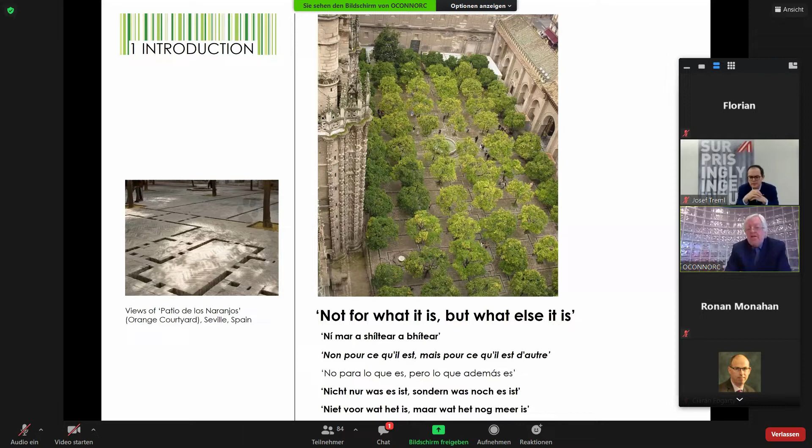So I always say about the green issues, it's not for what it is, but what else it is. I always think of that in Sevilla, where beside the cathedral, which was the old mosque, the drainage system for the town comes down and feeds the orange trees in the enclosed cloister. It's the use of that water that was being used throughout the rest of the town or city to feed the orange trees, because Sevilla is too dry in the summer months for the oranges to ripen naturally. So we had 1500 years ago people who thought about that and solved it, and in the same way, we can solve things ourselves today.

So what is it? It's urgent, it's local. It also has social, economic and qualitative elements. But I believe that you have to keep it simple, but not simplistic, and there is a big difference between that. The key relationship is between us and our world, and in a way that's as cohesive and reflective as possible. So I often think of situations like, what are the threats and opportunities? Not everything that people say is green is automatically good. So you have an orthodoxy or a dialogue: do you have the doomsday versus the economic progress?

These are not opposites. Or you have what some people would call woolly jumpers and green technology, or thinking against real R&D, or eco-bling, or citation rather than synthesis, or image rather than essence, or fascination with minutiae rather than imagination. I think it's important to move past that.

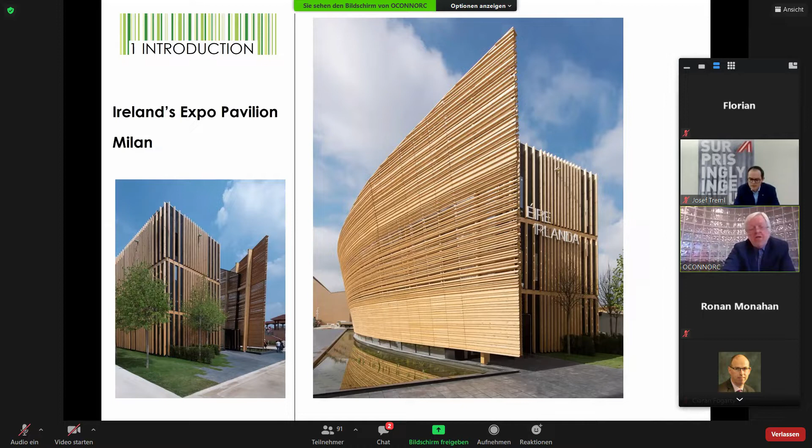You all know the principles of fairness and competition, environment, and how to reduce the impact - life cycle analysis, life cycle costing - all of those are still in development, and we need to keep that working.

We also have to meet the requirements, and we help the government in Ireland advise the Department of Environment and Housing on new forms of building regulation. We are part of a group that advises them, and SEAI Ireland would do that also. So we make those contributions, and we're now working towards near zero - we've been doing it for the last 2 years, and since last year, all buildings in Ireland have to be done to near zero.

And then the application to construction all the way from product stage through to end stage. Some of this is in early stage of development, but we are making good progress. Within the year, we would be producing a document called Green Public Procurement for Construction in association between the OPW and the RIAI. And then the whole aspect of procurement is a big issue, and EU procedures sometimes aren't the easiest things to manage.

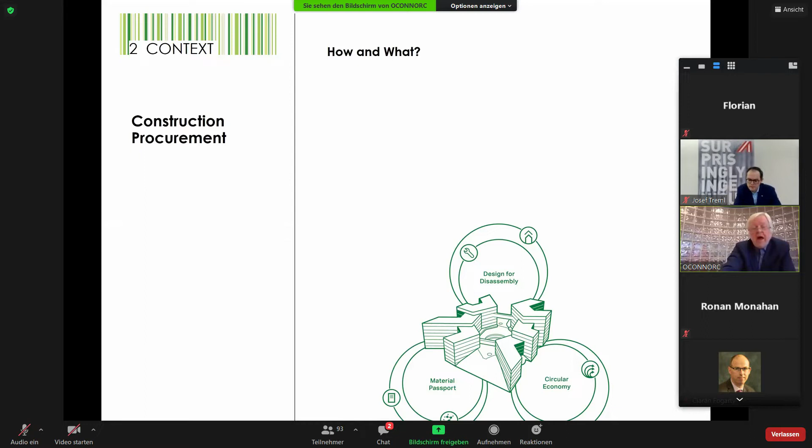And how do you manage that aspect from design through aspects of the circular economy to material passports and all of those elements that are needed. And the procurement is how and what are we. And the life cycle assessment of that and the cumulative environmental impact of all the materials. So we ask for the certificate of embodied carbon for every material that we use.

And then we are also always looking for innovation as well, and elements dealing with departments like the forestry people and others. We're involved in developing elements of that as well. And those impacts, a lot of people would be familiar with that, the materials, the transport, the maintenance, and some of that still has to have more scientific work done to it, but it is making improvement all the time.

And in that diagram on the right-hand side, all the different components that go in and how you evaluate that. And we're looking and developing that as part of our documentation. And then the stage guidance, our stage guidance that will be coming out with the new publication, will move all the way from site selection to end of life and potential end use, and the steps in between.

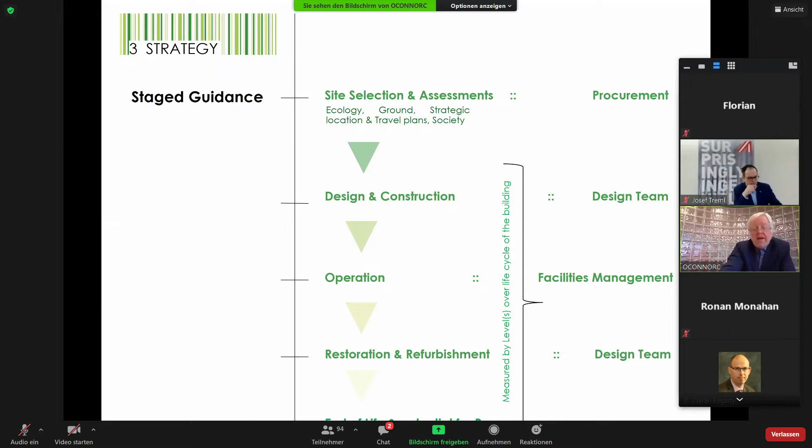So design, facility management, and then reuse. So core and comprehensive elements, the aspect of what's minimum to do and what would be better to do as comprehensive. And we still have lots to overcome in Ireland on that, with regard that if something is seen to be positive and extra, we should be able to support that.

But financially, our own Department of Finance needs a bit of persuasion on that matter, as probably most departments of finance do. We're lucky in the OPW that we're part of the Ministry of Finance, so we do have a reasonable voice there to make our voices heard.

And under our new development plan for 2018 to 2027, that's now under review, and a new enlarged plan will be developed in June of this year. Our office have been given charge of certain elements of that.

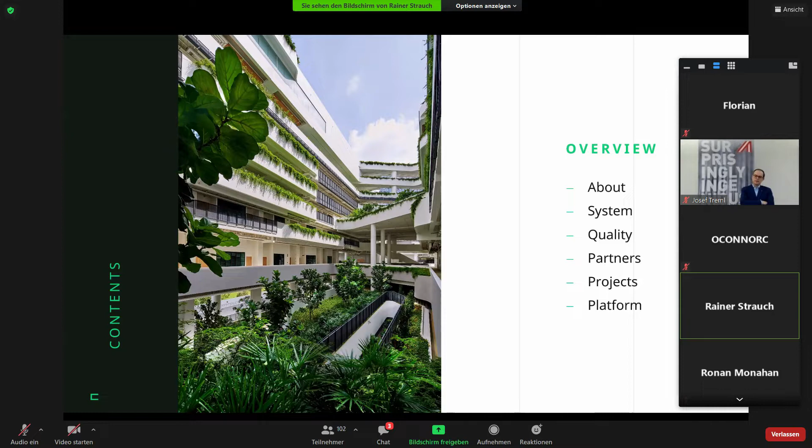And finally, the most exciting thing, I guess, is the projects we have already done, so to give you a bit of an insight into the great things that have already happened. And if time allows, I would also mention the platform in the end that we are working on right now and what this is about.

It's a timber-based prefabricated hybrid building. It's double the height than it was allowed for at the time of the erection, so we really stretch the boundaries and go beyond what is common sense in the current state. I will get back to that project briefly later.

So here's what we rely on and what we came up with first. We thought, how can we bring timber into large volume and tall buildings? So we thought about a construction system, a structural system, and a shell, an envelope of a building that can be prefabricated to the most extent, and that can be very quickly erected on site. First of all, we started with the grid lines. We knew that we need to achieve a high level of repetitiveness, so that we can also come to good economics.

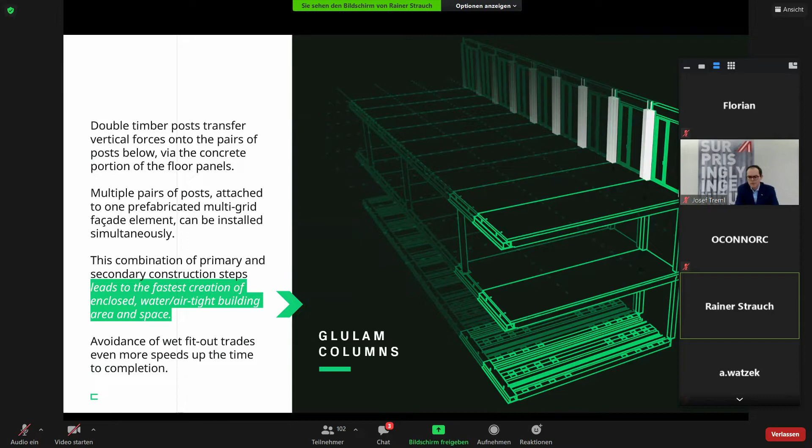If you do something in serial production, you're much better off economically. So then we rely on standard glulam columns. This glue laminated timber is a standard product that exists for almost 200 years now. It's like engineered wood, as we call it, that has very good properties for construction. Those columns come together with the exterior walls, which are non-load bearing, and they are assembled together with the columns.

Then we have introduced some interior grid extension lines. Those are pretty much girders that allow us to have wider spans, to cover greater areas, to extend the building footprint. And finally, the most important thing are the timber concrete hybrid panels. This is a mix of timber beams like glulam beams and the concrete portion that we also use for heating and cooling, so we combine the structure and also the building services in this panel.

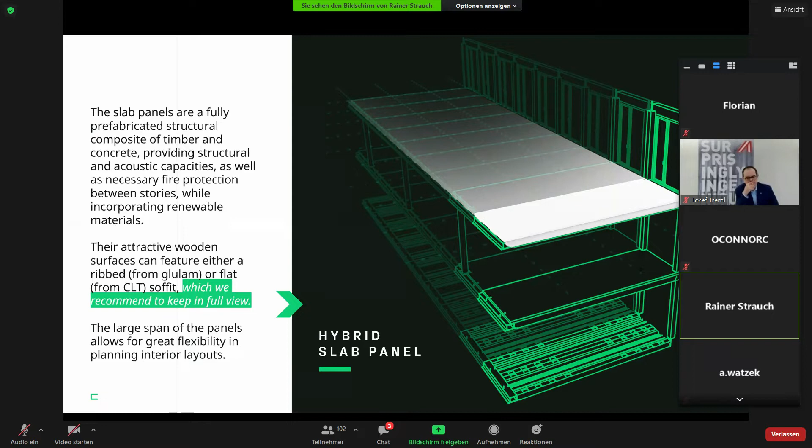When we talk about a system, we of course do not only mean the structural system and the shell, but basically the entire building. Because what we learned is if you only focus on the material and replace wood or replace concrete or steel by wood, you will never meet the economic needs of the client. So what we learned is that we need to look at the entire building from a holistic point of view to make ends meet in financial terms. We also optimize the process of construction.

What you see here is pretty much the conventional process where everything goes linear. You have a lot of feedback loops, you lose a lot of information, you consume people, resources, time and money. We think that needs to be done in a different way, where everything gets integrated right in the beginning in this CREE sense of doing things.

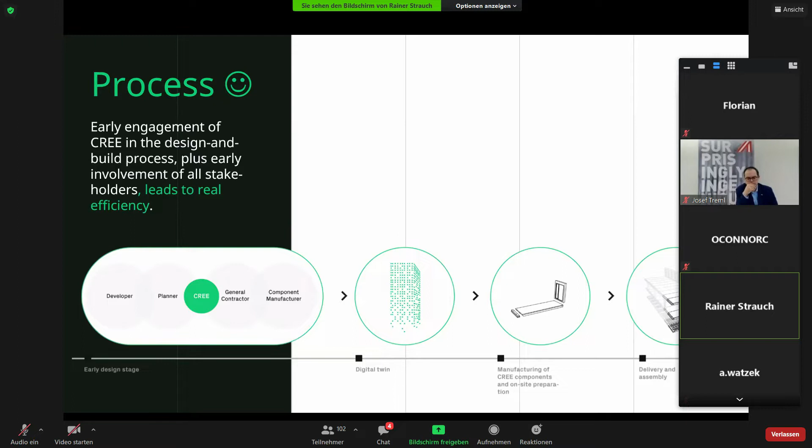The building is pretty much already there in the beginning as a digital twin. You put it to manufacturing and assembly, and then you have a much higher quality in a quicker period of time. So this is what is in for our licensed partners.

The construction companies benefit from the prefabricated hybrid components, from reduction of complexity, from minimized consequential costs from deficiency, because if you have a lot of well thought through details, nothing can go wrong on the construction site. Nowadays it's very important to have high safety standard and hygiene on the construction site, and if you only need a couple of workers instead of lots of people on a conventional construction site, then you have much better control.

So the superstructure allows for flexible layouts and easy occupancy customization. This is very important for developers.

The entire concept relies on local resources, and I'm not only talking about material resources, but also IP resources. That means local designers and developers develop and design the building, local manufacturers manufacture it, and local companies assemble it. We are not so much talking about construction anymore, it's more an assembly line. But all that is always being sourced locally.

Starting with the Life Cycle Tower in Austria. This building has been assembled in just 8 days - the entire building volume was put in place within 8 days. There were some auxiliary works which took a bit longer, but the main building volume was that quick. Here you see one floor that goes up in 1 day, and the interior fit out can happen right after that.

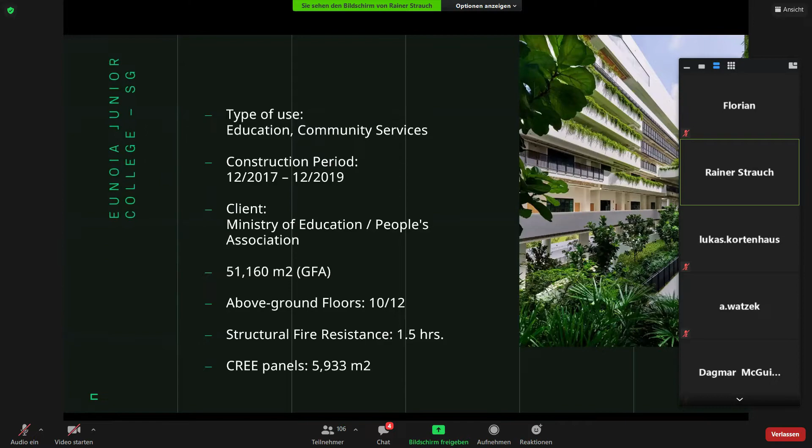That's a bit of time ago, like 8 years now. Here's a building that opened at the beginning of last year, a school in Singapore. Singapore is a concrete country, a concrete city-state.

Here you can already see some of the timber beams in the floors. It's a pretty nice environment, and the entire gray section you see on the facade has been built using the CREE system. It's 12 floors high, so we don't shy away from height limitations.

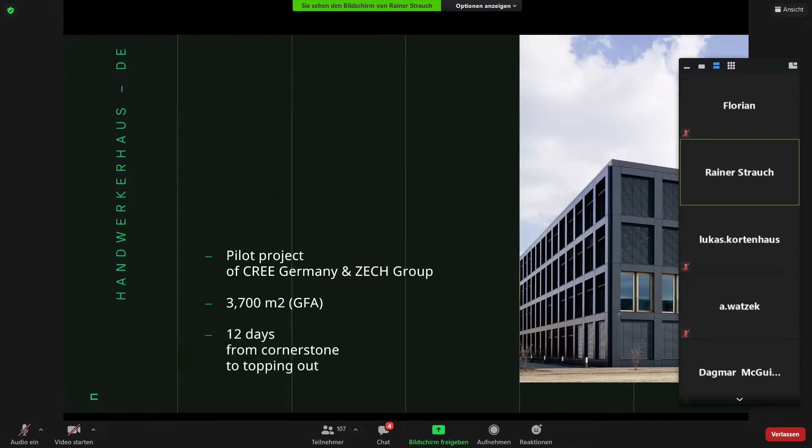This has been the first project in Germany, also opened spring last year. It's a perfectly systemized building. Construction time here was only 12 days, but for even double the size of the LCT1 that I'm sitting in. That's 3,700 square meters of gross floor area erected in just 12 working days. A bit of an insight, very nice work environment, I think.

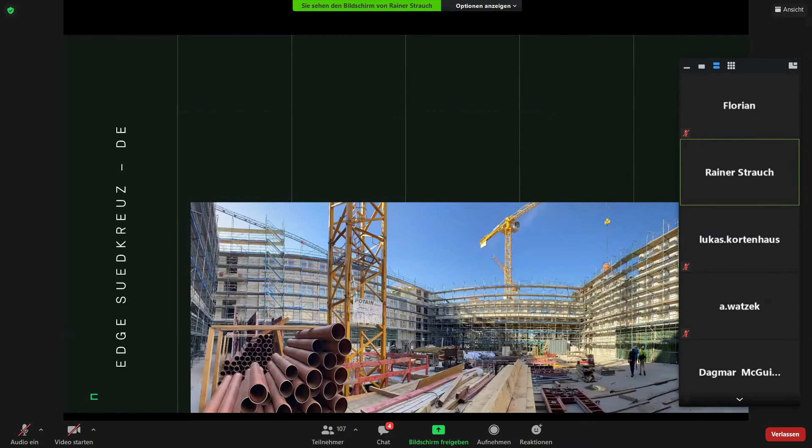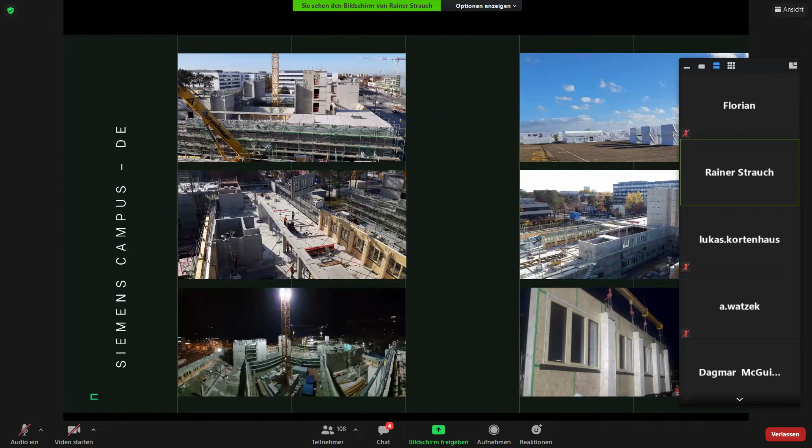In the picture on the top left, if you have a quick look, it looks like a concrete construction site, but from the interior it's almost all timber. That's the beauty, because the entire construction site is always perfectly protected from the environment, and on the inside you have perfectly clean timber for a nice indoor environment.

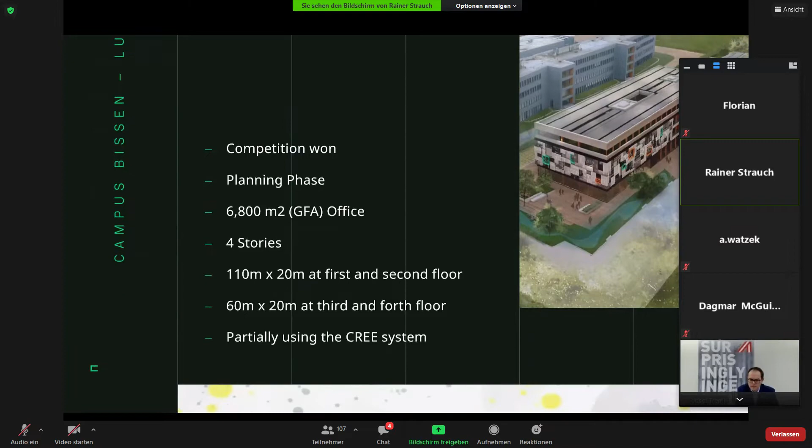Another project in Luxembourg has some beauty because it's also a very prominent building. We have won the competition there, and that shows multiple usage and also the ability to get extended over time, so you can add building parts horizontally and vertically.

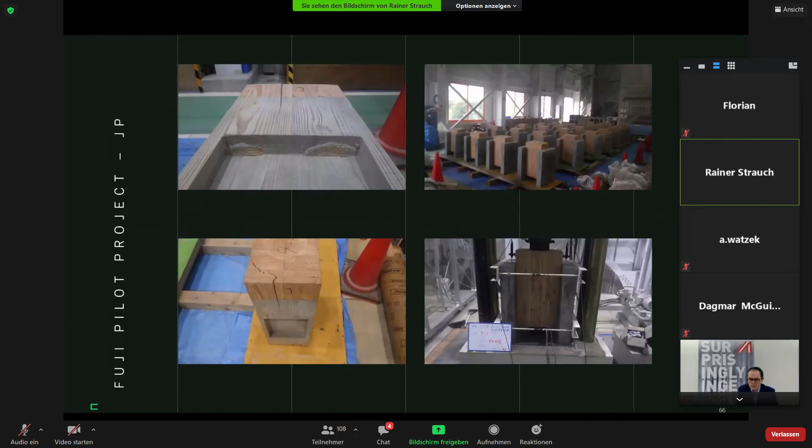I mentioned the Japanese in the beginning, so they are working on a quite small project, but they have tremendous challenges in terms of seismic and typhoon resistance. So they did a hell of a lot of testing. They Japanized the Cree system to their needs, and are going to build now this small prototype building. This is a mock-up they have already done, and it was quite amazing to see these things going up in Japan.

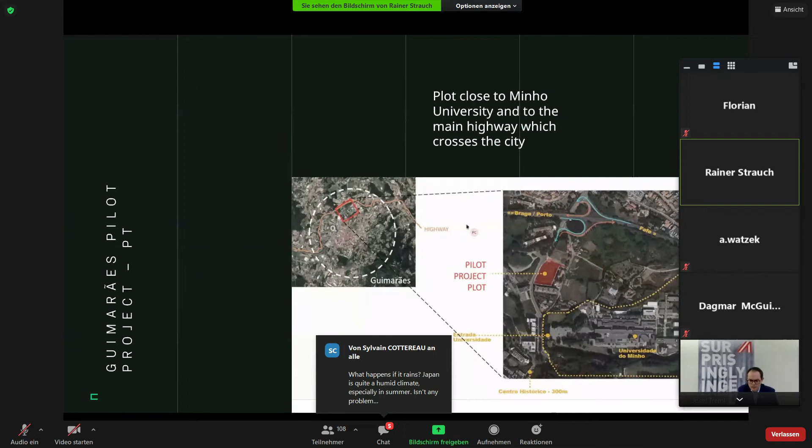Portugal has been one of our latest license partners. They are also working on a very innovative project, because here we integrate student housing and a hotel for the first time within the Cree system. It's 2 building blocks based on a concrete podium.

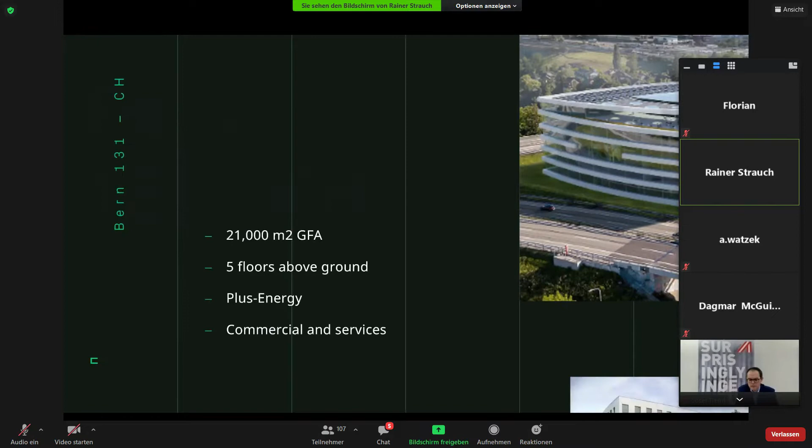I just wanted to show you this because if we always talk about rectangular buildings, you might feel a bit bored if you're an architect. But with our systemized approach, we can also tackle buildings like this, where we managed to bring a repeatable grid into the building.

So, do we have still time for the platform? I mean, I'm one minute over, maybe quickly.

What we currently develop is an online infrastructure which not only connects our license partners, but also grants access to subcontractors and suppliers and provides all the information you need. If you want to build a Cree building, you can share information, direct Q&A directly to Cree, collaborate with others, and share project status.

We have introduced a marketplace where we facilitate matchmaking between key stakeholders. We provide services for architects, and the outlook for the next level of the platform will be a multifunctional source of knowledge, of connectedness, of supply and demand. You could even run AI-based analysis over the platform.

So there's a lot of functionality coming up before the end of this year. And this helps us to enhance our global network, to make more people part of the Cree family. And that's where I like to end. Thank you for listening and watching.

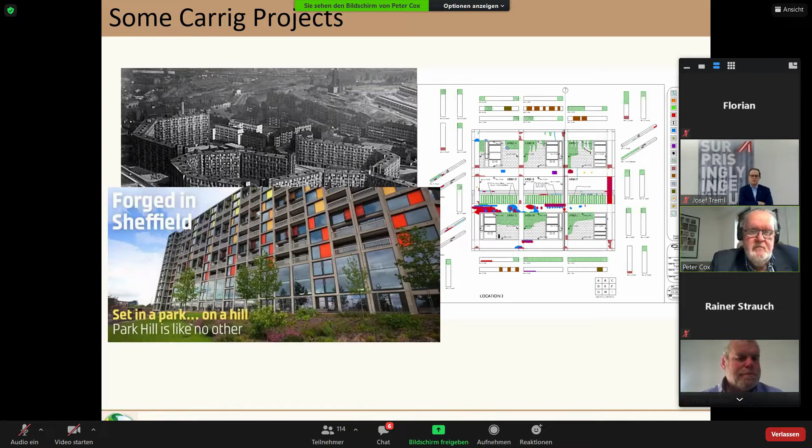And we're going to refurb and energy upgrade this building into a facility for guides and for workmen on the World Heritage Site.

We were involved in the Tate Modern, both phases. Phase 1 was restoring the 1950s building, and then a much later addition. The architect on this was actually Swiss, Herzog and de Meuron.

But one of our big collaborations is with the Fraunhofer Institute of Building Physics in Germany, which has a live laboratory in Benediktbeuern. This was a monastery built in the early 1700s. When we first went to look at it around 2011 or 12, there were about 6 monks rattling around in a building designed for 2,000 monks and 1,000 lay people.

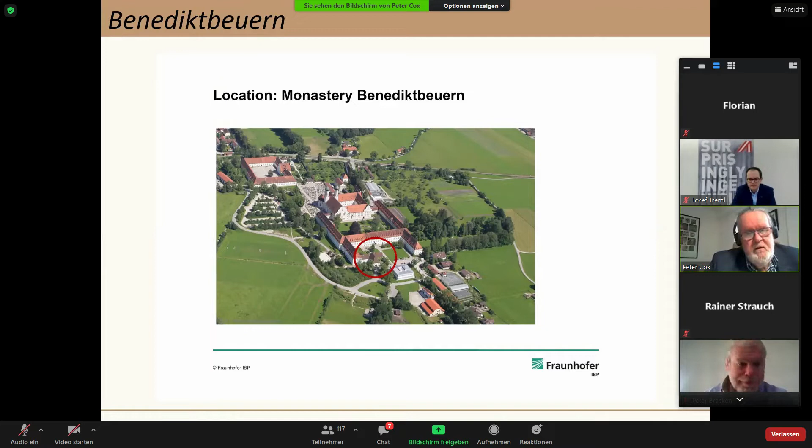So the Benedictine order gave it to the German government, and the government has been redeveloping and repurposing it over the last number of years. But they gave what was called the cooperage to the Fraunhofer.

This is a view of it in the beginning, before we did anything. It's a kind of T-shaped building, and the Fraunhofer decided they wanted to create a live laboratory here. So they looked at what they could do, and created about 12 or 15 different rooms with different systems.

We took off the external lime render that was past its sell-by date, and re-rendered it in a number of different systems. The beauty of working with someone like the Fraunhofer is they're wonderful on widgets and gadgets, and we could put every monitoring system into this building, which is phenomenal.

If you look at the restored facades: we decided that this facade we would just put back 40 mil of pure lime render as a kind of baseline. The front facade has lime with hemp added as an insulant. On this side, it has lime with cork added. And the last facade, we added aerogel with lime render, all within the zone of the original 40 mil thickness.

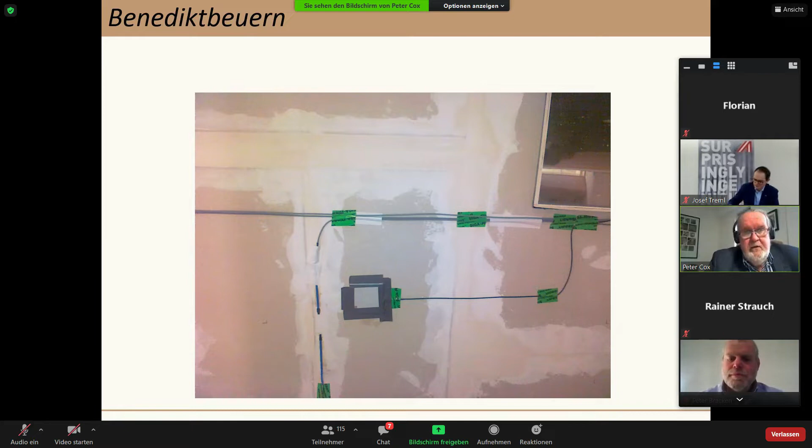On the internal side, we've again tried out different products. We've used an ordinary gypsum wall board, but we're also using Calsitherm, a lime-based internal lining. Here's some of the widgets we're using to monitor moisture movement, relative humidity, air temperature, and air quality as well, and we do this roughly every 15 minutes.

This has now been recorded over about a 3-4 year period, and the Fraunhofer are hoping to publish on this later this year.

We've also been working with about 15 major manufacturers throughout Europe to try to tweak or develop products suitable for older buildings, what we generally term breathable buildings. Because if you put a closed insulation system such as polystyrene or polyurethane, you're changing the dew point and moisture movement, which is very detrimental to the original building fabric.

We're even working with a paint manufacturer where he can add aerogel to it, so a simple painting might improve our U value calculations.

The deep energy renovation of traditional buildings was commissioned by the Irish government under SEAI, the Sustainable Energy Authority of Ireland, under their research, development and demonstration funding package.

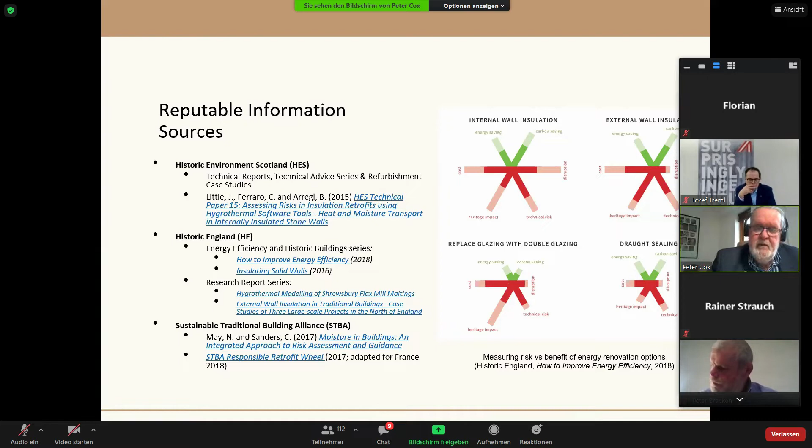What we find are the reputable information sources for this subject, which is basically energy retrofit of older buildings: Historic Scotland have done a phenomenal amount of work, and we're lucky that we also work with them on certain elements. Historic England, I've already mentioned, commission research but also produce pretty major documents which are very relevant. Then there's an organization in the UK called the Sustainable Traditional Building Alliance, and they came up with this product called the Wheel, an interactive online system where you can input information and it'll tell you what you can and can't do, or what you should and shouldn't do. It's a very good basic tool, a good one to play with.

Out of our study of the gap analysis on skills and training, one of our top recommendations was that there should be a pilot run of 10 modules of CPD lectures. We put a further proposal to SEAI and got funding assistance. We partnered again with the Heritage Council, and attendance fees were subsidized by the grant from SEAI. We ran 5 lecture days from November 1st, 2019 to 31st of January 2020. The RIAI gave CPD credit points, as did Engineers Ireland. Unfortunately the Surveyors Society of Ireland doesn't have that scheme, but it was phenomenally well received. We based it on having 100 people attend, but within a week of releasing it we had 120 applications, and by the time we had to close it we had 70 people on a wait list. So it was hugely sought after and appreciated.

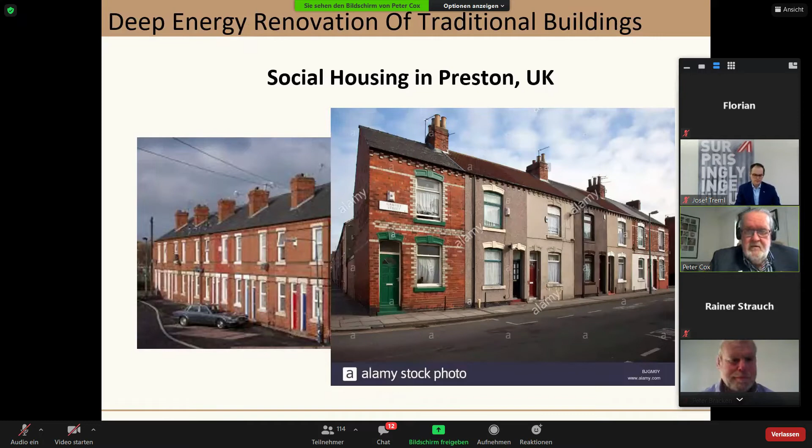So, social housing in Preston - this is one of the big mistakes that have been made, where they started putting external insulation on nice brick facades, but didn't do it well. You can see some of the changes to detail, which is what you shouldn't do with a building, changing the geometry of the building and creating major problems.

The scheme in Preston was 300 social housing units. They moved the 300 families out, spent roughly 28,000 per house upgrading it, moved the families back in, and now 4 years later they have to move them out again and spend about 150,000 per house to correct the mistakes that were made. That's not good for the industry, not good for sustainability, and there's going to be a lot of carbon dumped effectively. So we do need to be careful what we do.

The study that we did for Historic England on understanding carbon in the built environment - basically we took three case studies. Could I ask you to wrap up? Okay, I'm sorry for interrupting, but you're fine.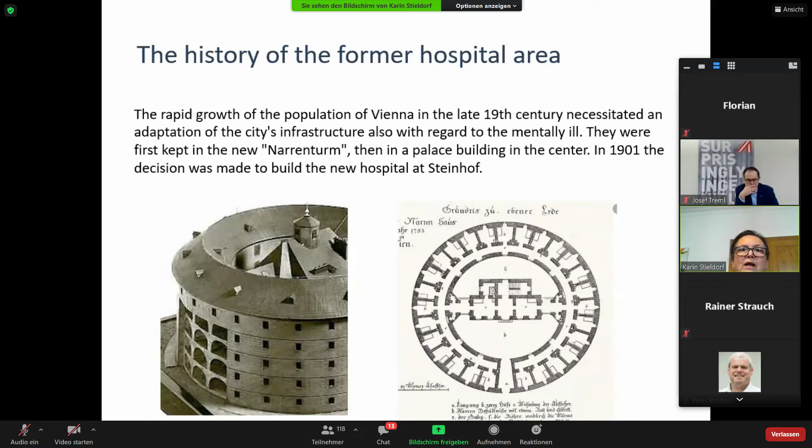They were first kept in the Narrenturm, which you can see here, and then in a palace building in the center, which soon became too small. Since expansion in a central location was not possible, the decision was made in 1901 to build a new institution at Steinhof, which was at its time the most modern campus for mentally ill in the world.

Well, now this will be changed. It's no more used as a hospital, but it will be used by the Central European University, which will move from Budapest to Vienna. And Vienna is happy to welcome the CEU.

Well, the goals of the development - I worked on the refurbishment for 1 year together with students, accompanied by a research project where we had a look at the goals. The goals were first to develop the first Energy Plus refurbishment of a large listed area.

It should be an integral design process regarding the location, which is a little bit further up from the center of Vienna, regarding further different kinds of uses. And the project task was a quite wide one in spatial organization, strategies for sustainable and energy efficient construction for historic buildings, simulations - so all these topics should be regarded within the design.

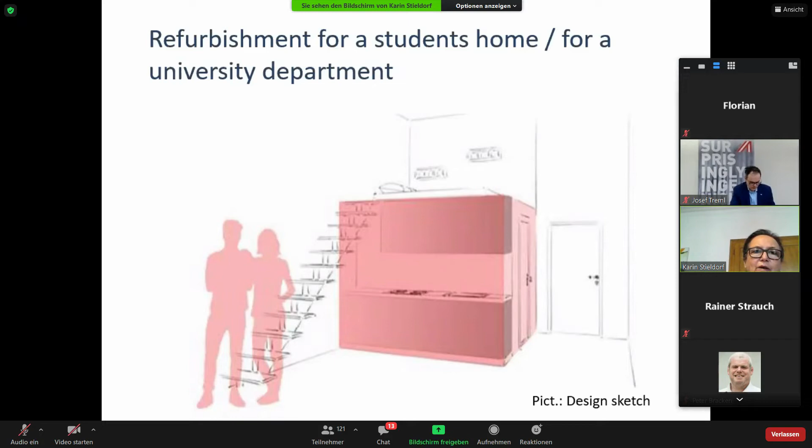Then the refurbishment of exemplary student pavilions for students' homes or for university departments, regarding the height of the rooms within the pavilions, having a look at what can remain and what should be new, and most important, also developing exemplary details for the insulation - interior insulation with calcium boards.

And of the roof with vacuum insulation, but also for the supply of the buildings. Having further a look at the exterior area, a section showing the exemplary details we worked on, and of course the area also will be supplied by photovoltaics, and this with regard to the listed area.

Some examples - this is one of the pavilions that we researched as an exemplary pavilion. There's exterior insulation on the bottom, and there could even be transparent photovoltaics in front of the facade, which could be taken away later, so it would be accepted even for a listed area.

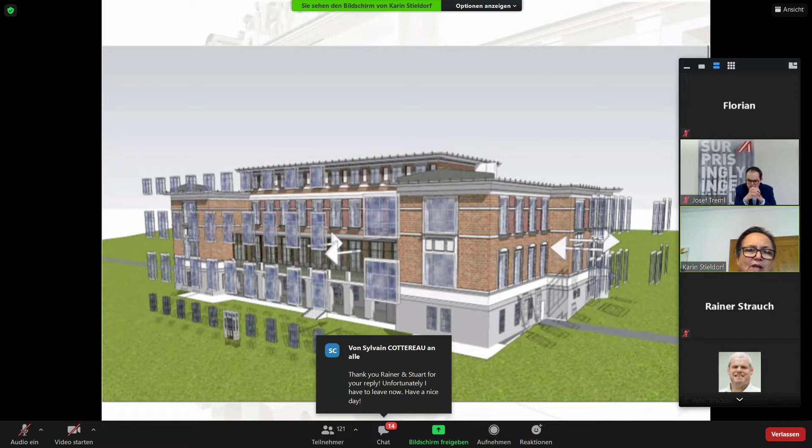Well, coming to urban residential areas, I developed a catalog of new requirements that are important for housing within the center. Some of the very important points are that gardening and food production should be included, that there should be planning guidelines for energy conscious construction, and what is quite new - a massive support primary construction and fill-ins from renewable materials.

Some examples - this was a student competition for Vorarlberg in the west of Austria, where the tradition is building with wood, integrated in the pattern of the not very dense town of Feldkirch, on the not very dense outskirts of Feldkirch.

Situated close to a kindergarten and to a home for elderly people offering assisted living, and integrating green spaces also in the interior, with a lot of light.

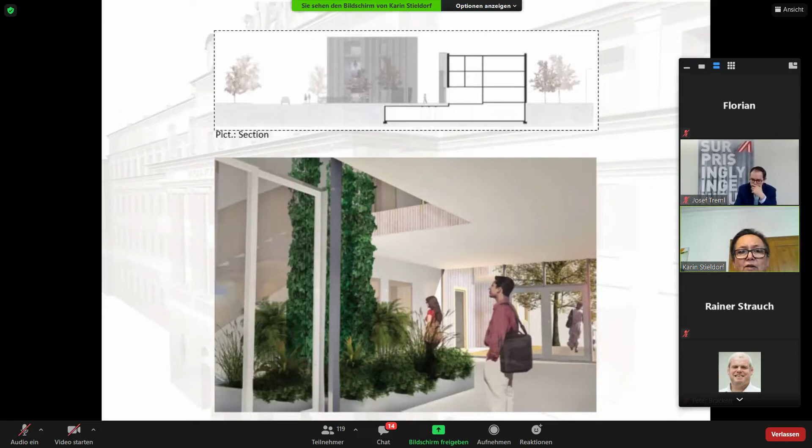A second project for migrants and students was on an empty area close to the center of Vienna. Quite frequently we still find vacancies within the structure even of the center of Vienna, and this was an example of how to activate the existing building stock, even in situations where you don't have enough sun and light. All these topics had to be explored, even regarding thermal performance, and this shows that two-story solutions can also be a good way to activate the existing building stock.

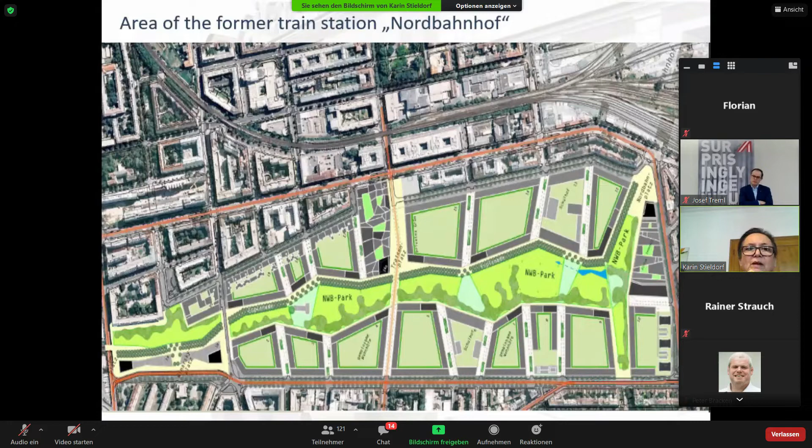This was a project for an area of an old railway station which should be activated, which is quite frequently done in Vienna at the moment, to find new uses and new structures for the old existing areas. This shows the winning project of a competition on urban development of that area, and our solution was again research-led.

It shows how to use this structure of combining massive and light elements, and even leaving some areas empty if you don't need them at the moment. This solution should also be offered to people who want to be integrated in the building process.

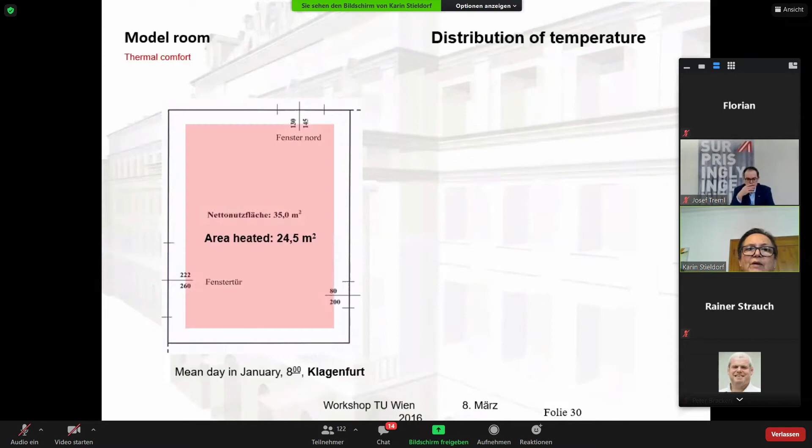One of the important options at the moment, which we also used here, is a so-called activated floor construction, where the heating is included in the massive and storing floor. This is a very good solution, because it addresses the argument to use concrete in construction, but it can still be combined with light and ecologic secondary construction.

This was the research project accompanying this work. We tried out the first elements together with students: insulated wall elements and floor elements, insulated with straw and covered with earth. Of course, other insulation materials could also be used.

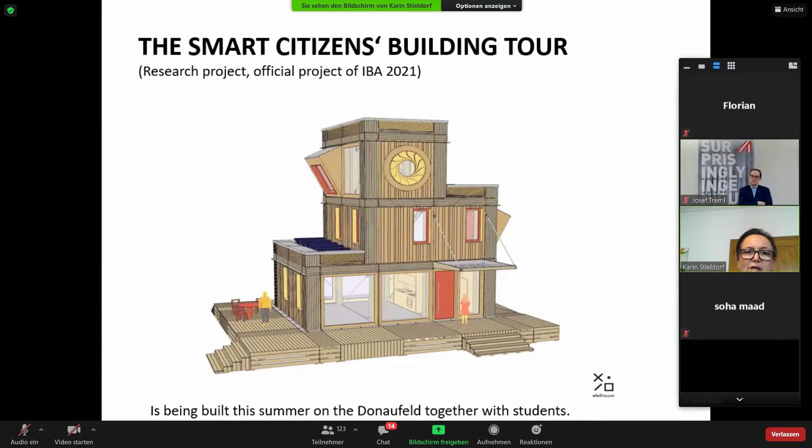The company that assisted us was Lukas Lang for that project. They built the temporary parliament, in a way that it could be assembled and disassembled and used at another place later. Here you see the elements designed and built by the students. An additional result was also a book for DIY constructions as a guideline, available for everybody. This was the production line set up at the factory of Lukas Lang.

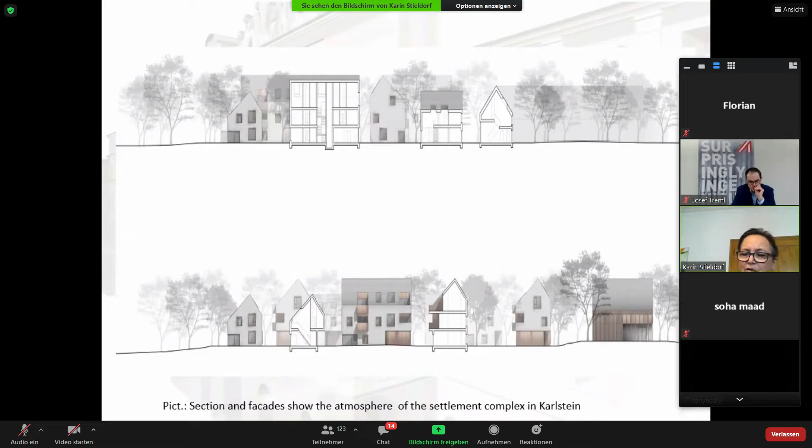We're going to rural areas, which are a little bit problematic. There we like to use the technique of the big picture to develop visions and communicate them to the people of the area. It's most important to find out the right density and how to include traditional living patterns and construction patterns. This was one project just being carried out at the moment, which shows that traditional elements have been taken up, and density also follows the traditional patterns.

Another project we were asked to deal with was the center of Kirchberg am Wechsel, a small town in the south of Vienna, formerly important for tourism but not working very well anymore. So again, using the methodology of the big picture, we developed a vision.

Our task was the recovery of the old stock, the revitalization of the town center, to define living in the town center versus space consumption in the undeveloped area around Kirchberg, and the conservation of the green spaces in the center.

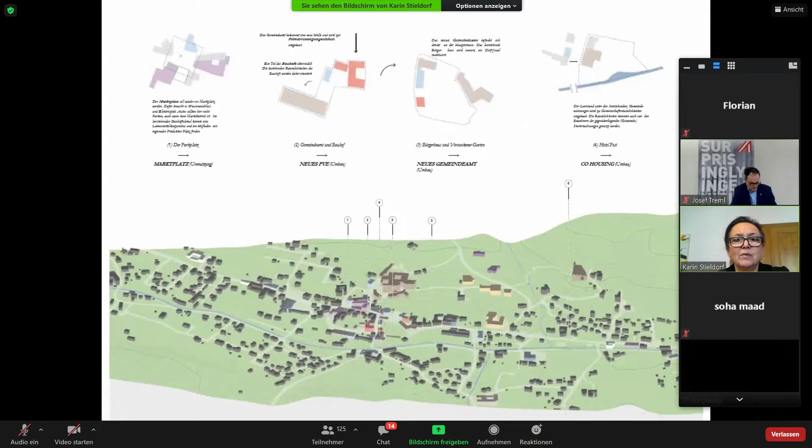The first thing to do is use the technique of walking through areas to really explore them well, and then explore in more detail the landscape, the building structure, and the traffic connections, taking a closer look at the center and how the buildings there can be restored, reused, and refurbished, concerning thermal performance, but also design, while still using the public area in the center.

Now, the last part is a series of small houses, which we made for different competitions.

This was the winning project of Gaudi, an international students competition, where the topic was to deal with ecological materials.

This house was positioned in front during the Biennale in Venice, directly at the sea. Everybody could walk through the house and have a look at how pallets can be reused and recycled, even if they're a little bit not very perfect anymore. So we could walk through and have a look.

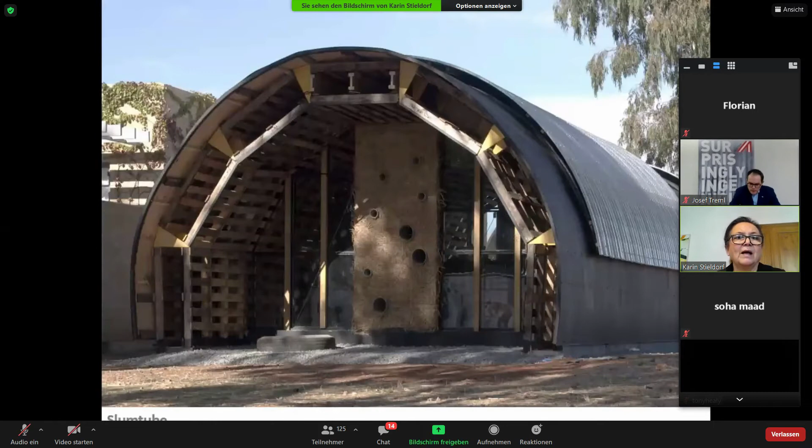This is in the meanwhile a pattern. The system was also applied for a school in Johannesburg, in the suburbs, and again pallets were used along with more recycling material. Only the sheets on top, on the roof, are new because you can't get old ones. From the statics, this was the easiest way to build without companies.

This was LISI House, which was the winner of the international competition Solar Decathlon in 2013. LISI means Living Inspired by Sustainable Innovation.

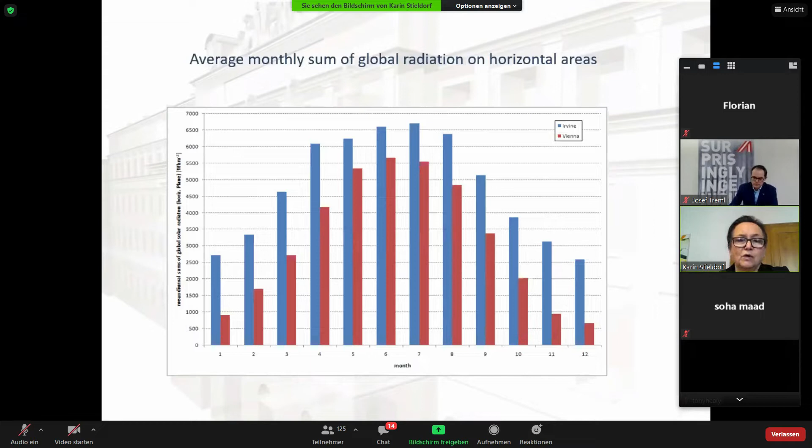The philosophy was to use wood and all parts of the tree, as Austria is a country with large areas covered with wood. The beginning was to have a close look at the climatic data, which showed that in summer it's approximately as hot, not much hotter than in Vienna, but there's a large offer of global radiation of solar energy, which can be used for the supply of the building.

So the concept refers to the Hispanic traditions of Los Angeles, and the patio in the center is a buffer which can steer the income or the use of solar energy and shading.

The construction followed modern Austrian wood construction. The building was designed in modules, which made it easier to carry it the long way from Austria to Los Angeles and back.

This is how it was mounted together with students. The interior shows how wood can be used also as a very attractive surface, showing different kinds of wood and different surfaces of wood.

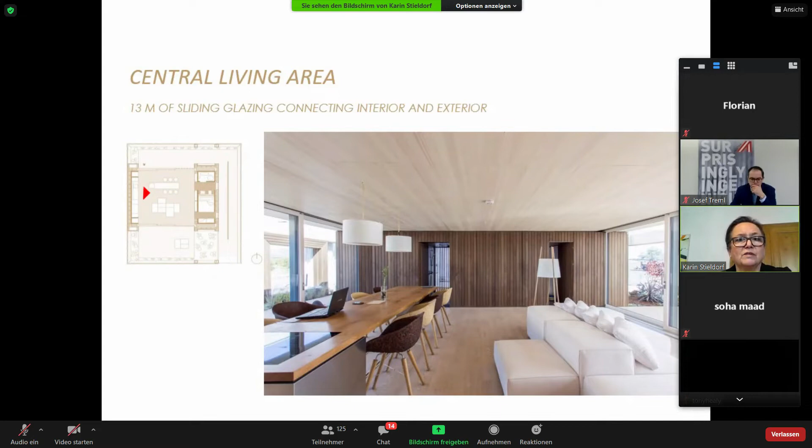Housing technology was a double flow system connected with two heat pumps, and the supply of the total area of the house in total was by photovoltaics.

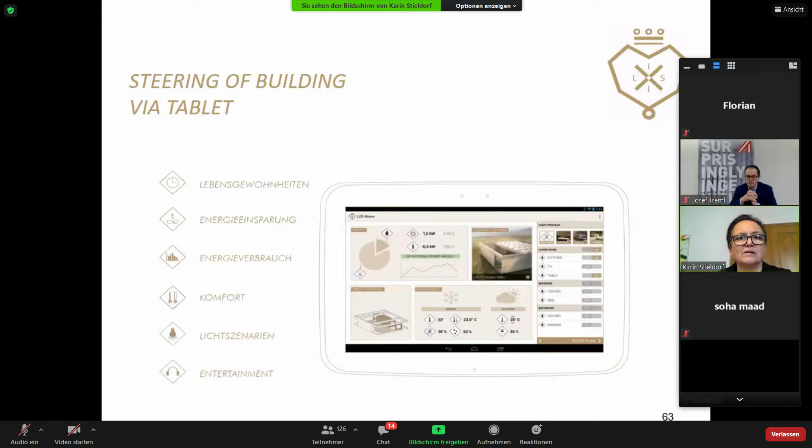And the energy balance showed how far up the plus it is - it's an energy plus building, really far above zero. The building is steered by a tablet, which was also developed for this competition, with an attractive surface that responds to the user by music.

It was published in the Architectural Digest in 2018 under the title of Building Physics, Design and the Collaborative Build.

And this is how it is set up again in Austria after having been brought back from Los Angeles, now floating on a small lake in the exhibition area, the Blue Lagoon, south of Vienna. It can also be bought there - it's shown and it's bought there. And I think many of the other producers have had a closer look at this plus energy house.

The last project I want to show you is a project.

Karin, yes? I'm sorry to interrupt you, but I think we are out of time.

Okay, it's finished, I'll just go through without detail. You can see, I think it's self-explaining - people working, a large roof, shaded areas. And this is how it works.

This is my last slide. For me, sustainable architecture matters, and it is even indispensable in the struggle for climate change and a good life on Earth in the future.

Thank you for listening, and sorry for being late.

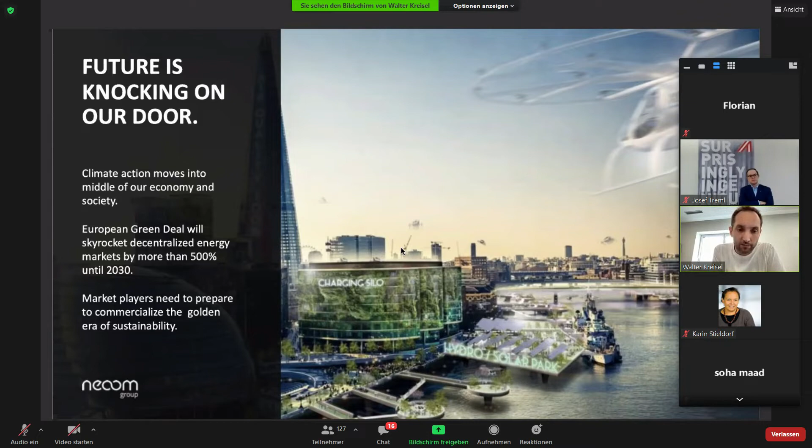So what is our business model? Our business model is holistic and integrated. We have three main departments.

One main department is the whole hardware stuff, which you will see later. It's NEOOM, and NEOOM is the coral red-driven color. On the NEOOM side, we produce products. We redesign, engineer, and certify home, commercial, residential and industrial battery storages based on lithium-ion batteries, which is a turnkey solution, fast installed, commissioned, and maintained, to keep the whole energy consumption in the life cycle process as cheap as possible. That means not only the CapEx to buy all that stuff, but also the OpEx to produce, transform and convert electricity, which is a very important case we focus on.

And surely it's driven by the big ramp-up of the electric mobility sector, because all your infrastructure has to be wired, has to produce solar on site, and you also have to charge your cars. Based on our energy management solution, we really take care that buildings can become the next power plants.

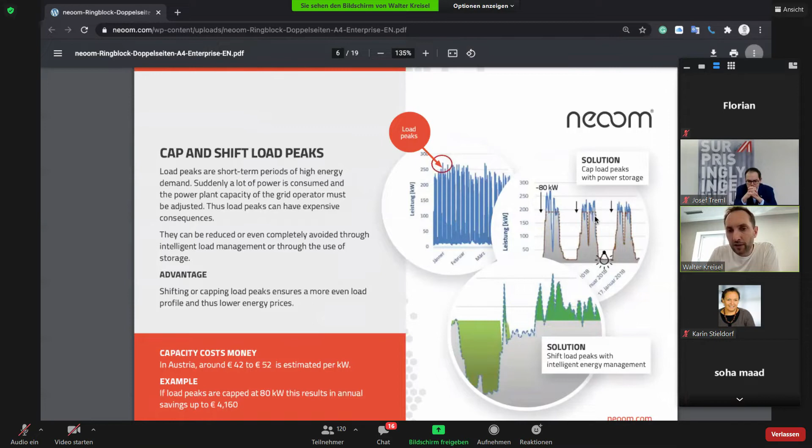Here's another calculation. If you produce 1 million kilowatt hours on your roof and have a battery, using our Austrian prices for example, it brings you 11.8% rate of return, which is really high profit after 25 years. So it's even double more than you already invested.

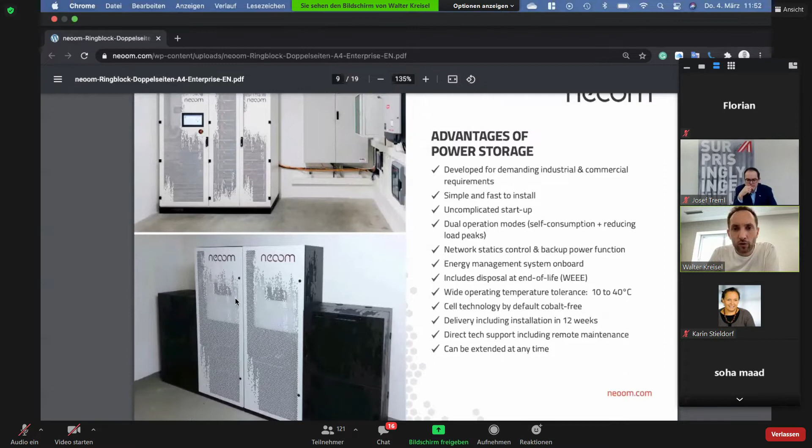From that side, this looks like a small industrial site or a private site. I will share the data — this is how our software looks like. And there is also a future-proofed business model.

Think in applications: with the software you can also count your CO2 consumption, and connect applications for buying electricity on the stock exchange or on the frequency response market. That means your income, based on your investment in the infrastructure, is really driven by high value. So that's from my side, from NEOOM, and thank you.

We are now in Zurich, Vaduz, Munich, Freistadt and Vienna. Me and my team, our management team and the board, are happy to help you also in your country, to bring down energy costs, have lower CO2 consumption, and make the energy transition possible. If there are questions, write me, or contact us anytime on our website at www.neoom.com.

Thank you very much, Walter. Very interesting insights, and thanks — I really like that you put numbers on it, because sometimes you don't get this real hardcore detail, which makes the technology even more interesting for clients, potential clients, or people who want to partner with NEOOM.

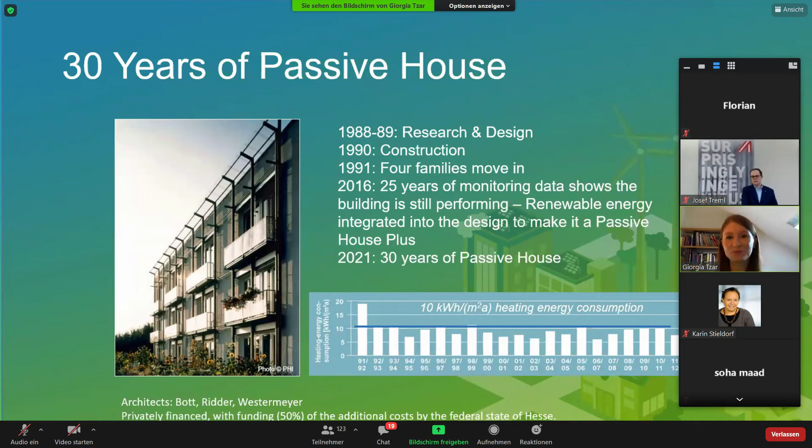The first Passivhaus then went on to inspire a global movement. We now have 2.7 million square meters of total floor area of Passivhaus buildings around the world today. And we also have an entire market for these products, so no more requirement for DIYing these—there's now a wealth of suitable components available.

But for some of you here today, you might not be so aware of what the Passivhaus standard is and what a Passivhaus building is. At the heart of it, a Passivhaus building is a highly energy efficient building. It is based on the Passivhaus standard, which is a quality assured, scientifically proven method to achieve highly energy efficient buildings across new builds and retrofits of all kinds and across all climate zones.

There are 5 principles that go into Passivhaus: climate appropriate thermal insulation, Passivhaus windows, adequate ventilation strategy, proper air tightness, and a thermal bridge reduced design, so that a Passivhaus building works much like a thermos, keeping the warm air in when you want it in the wintertime and keeping the cool air in the summertime when you don't want to be overheating.

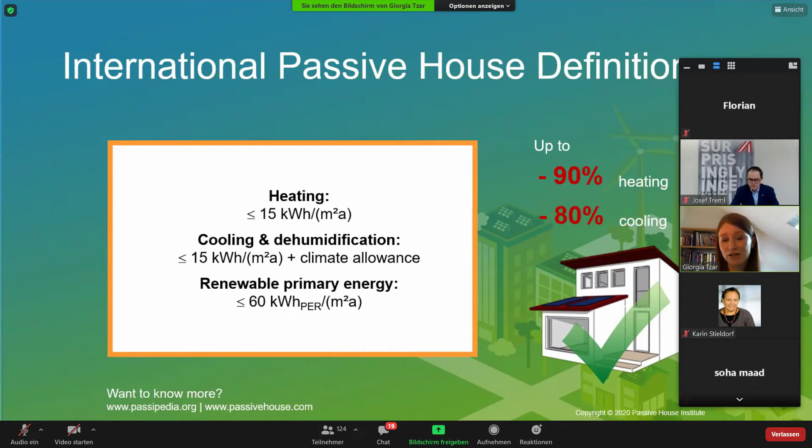Of course, that is an oversimplified explanation of what the Passivhaus standard is, and there is a clearly scientifically defined definition with criteria which are available via our website. But the result is the same: a reduction of up to 90% in heating demand and 80% in cooling demand as compared to traditional or conventional buildings.

So what sets Passivhaus apart? Well, first and foremost, the Passivhaus standard is performance-based. It is not prescriptive and it doesn't require relative savings—there are very clear, scientifically based and transparent criteria. The Passivhaus standard also ensures predictable energy savings with no performance gap because of this science-based and transparent criteria.

Because it is based on building physics, it is applicable the world over. As you may be aware, physics are the same all over the world, which makes the Passivhaus standard not only flexible, but also replicable. Important to note is that it is an open standard—it's not a brand, so it is publicly available, and anyone who would like to take the efficiency first approach and meet the criteria and thus build a Passivhaus can do so. In so doing, they're also doing their part towards achieving substantial energy savings, which are not only crucial to a sustainable energy supply structure, but also to meeting our climate goals.

What is particularly of interest, potentially after our previous speaker, is that passive house and renewables are a match made in heaven. The low energy demand of a passive house building makes it easy to achieve more with less, so renewables placed on even a small surface area suffice to cover the majority of energy needs for that building. And the efficiency first approach reduces the costs for energy infrastructure and also helps empower local communities.

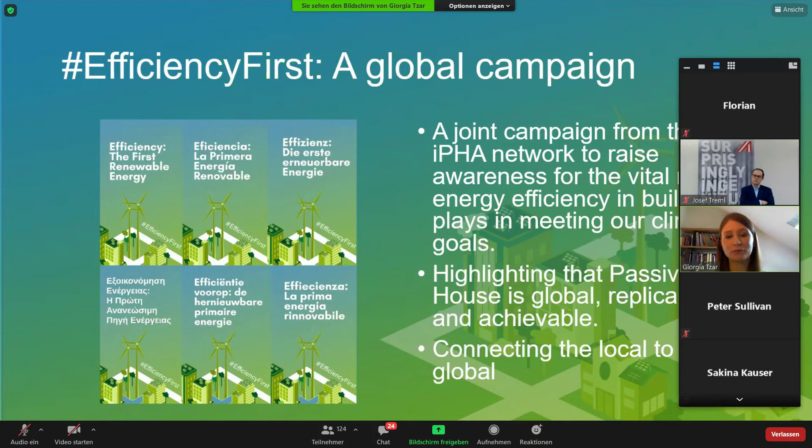It's not just our opinion that contributes to this year's campaign. As we have noted, Passive House contributes in major ways to the Sustainable Development Goals. Passive House provides a cost-effective, resilient, healthy environment for building users, and thus contributes to health and well-being. It lowers carbon emissions through high energy efficiency to help combat climate change. It makes use of renewable energy sources to improve access to affordable and clean energy. It provides jobs throughout the whole range of building professions, from manufacturing and construction to design and development, and thus creates opportunities to boost the economy.

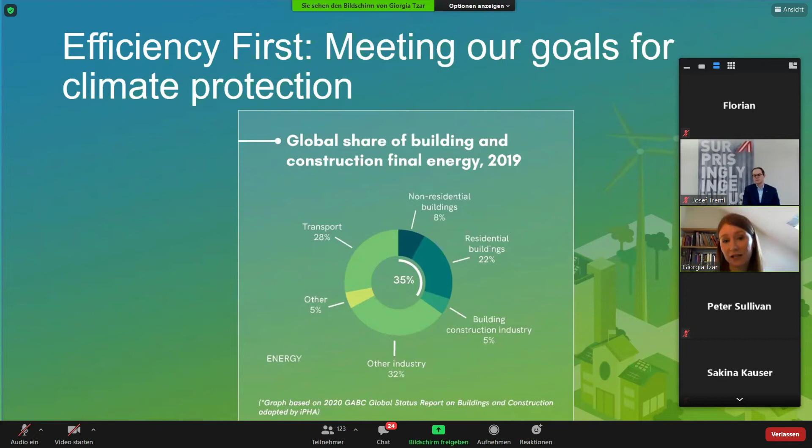You may also be aware that the UN's IPCC has stated that we need to enormously reduce our carbon emissions if we are to meet our climate goals. A study that came out in late 2020 from the Global Alliance for Buildings and Construction found that 35% of the global share of final energy use comes from the building industry, and that the bulk of this is used in the operational stage of buildings. As you may also be aware, the operational stage of energy use is almost exclusively from heating and cooling demand. And that's really where Passive House shines, because that's what we reduce.

However, I do accept that for the individual, looking at the Sustainable Development Goals and the IPCC might not hit home. Luckily, the associated benefits of building better exceed the environmental benefits. Certified Passive House buildings also achieve a high level of comfort as they're optimally insulated for their local climate and create a consistent, comfortable and healthy indoor environment. They provide consistent fresh air through the ventilation system with heat recovery, caring for the comfortable indoor temperature. This is particularly important in the times of Corona, as these systems also come with filters.

Passive House buildings are also built to last, as they're resistant to moisture buildup and mold damage, thanks to their great air tightness and high quality components. They perform as planned because the planning tool, PHPP, ensures a reliable energy balance, and thus there is no so-called performance gap between the planned energy use and the real energy consumption of the building in operation. Passive House buildings can also be designed as desired, as it is a performance standard without a specific construction method, which leaves designers free to choose how to meet the energy performance criteria.

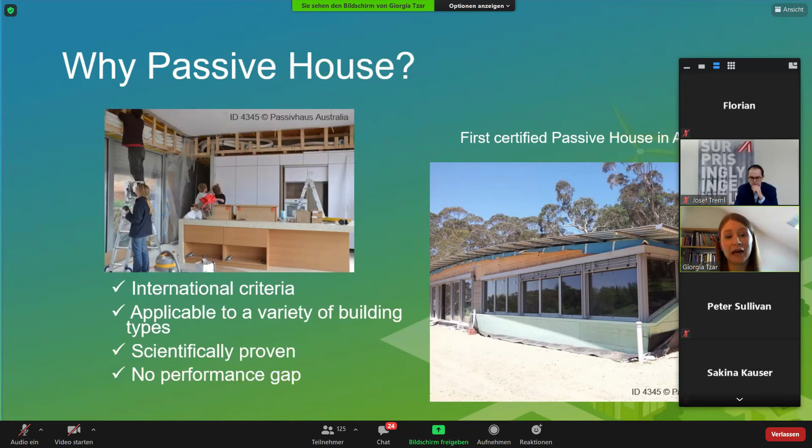So finally, if you're not yet convinced, why Passive House? And I would ask, why not? There are international criteria that are applicable to a variety of building types. It is a scientifically proven method for achieving better buildings that are highly energy efficient with no performance gap, and there are both capacity building and market opportunities available worldwide.

Passive House buildings can be built to any shape and for any size, including an entire district or a tiny house, or even skyscrapers. They can be built for any function, including museums, supermarkets, schools, swimming pools, hospitals, factories, and even religious buildings. And most recently, an enclosure for the hippopotamus at the Munich Zoo, or potentially Berlin Zoo, but a zoo nonetheless. And they can also be made for any budget and any construction material, according to local preference or cost restrictions, including the straw bale house here on the right, wood, which is very popular in Canada for example, or earth or masonry construction.

And finally, Passive House buildings can be met for new builds or retrofits. So the important thing here is to think efficiency first and then just set your creativity free.

There are a wealth of free resources available via our website or via Passipedia, the Passive House Wikipedia tool. You can also take the Passive House for Decision Makers course, which takes about 25 minutes and is completely free. And there are, of course, a range of blog articles and videos available on YouTube and the IPHA blog.

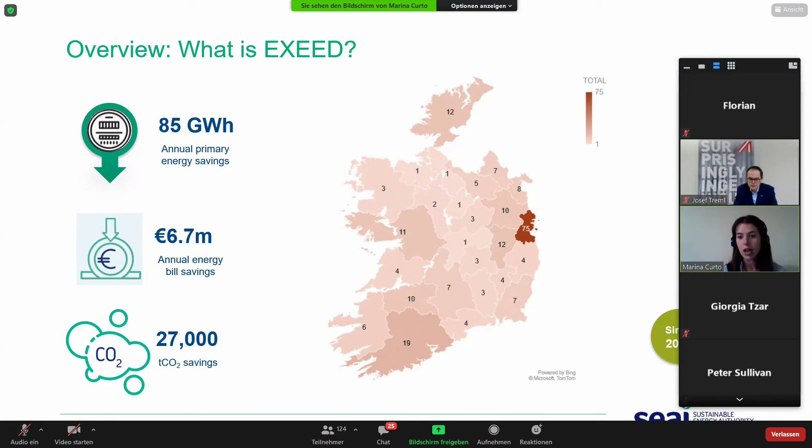So who is it for? EXEED is for organizations making a significant investment in an asset, and it can be a completely new build, a new or existing process, a major renovation, or a major energy upgrade of an existing building.

Why should you be interested? First of all, we have 14 million available this year for EXEED grants, and we are expecting similar or higher levels over the next couple of years. We can provide EXEED grants of up to 1 million per project.

But even without the grant, the EXEED approach to energy efficient design makes good business sense. EXEED sets out a clear process to help organizations design for optimum energy performance. It goes further than just looking at a more efficient boiler to replace, for example, but looks at the full range of energy uses in an asset, including heating, cooling, ventilation, refrigeration, compressed air, and more.

By helping companies identify the best opportunities specific to their asset, EXEED can reduce energy bills and associated carbon emissions. This can increase competitiveness, and as you saw in the EXEED plaque earlier, it also shows a commitment to sustainability that can help boost your green credentials.

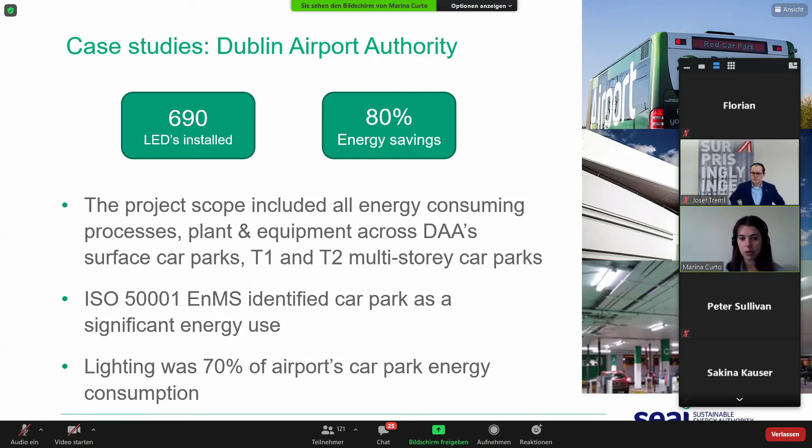They found that EXEED helped them achieve very substantial reductions in energy use, about 80% energy savings. The project also brought co-benefits, including reduced maintenance and improved lighting quality in their car parks. You can read the full case study at the link provided, in case you are interested.

They have responsibility for leading on a suite of pre-investment studies, which I'm going to look at in the next slide.

So when we start our journey in EXEED, one of the first steps is to identify the baseline design and carry out an energy balance study. This will help in identifying the significant energy uses within the asset.

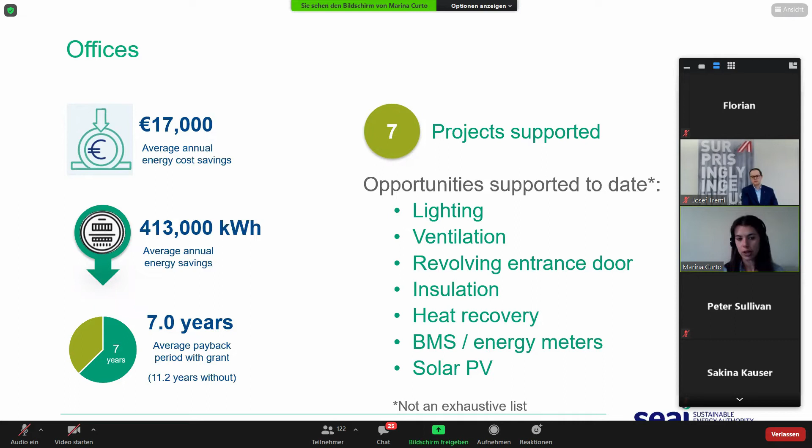Now, how to apply? As we saw earlier in the presentation, the earlier you begin your energy efficient design in your project, the better. Once you know you are just planning a project, you can apply for a stage 1 grant support for EXEED. You will need to appoint an energy efficient design owner from your organization, who will be the lead applicant for the grant and have responsibility for ensuring the energy efficient design is implemented for the project. You will then have to identify a suitable EED expert for your project and complete their stage 1 application. This is then brought to SEAI, and it takes up to 3 weeks to issue what's called a grant letter of offer. Once you receive this letter, you can get your EED expert to start carrying out the EXEED studies.

Once these studies are completed, you will end up with a comprehensive list of opportunities suited to your asset. And then when you've made a decision on which ones you would like to invest in and implement, you can submit a stage 2 capital application for capital grant support.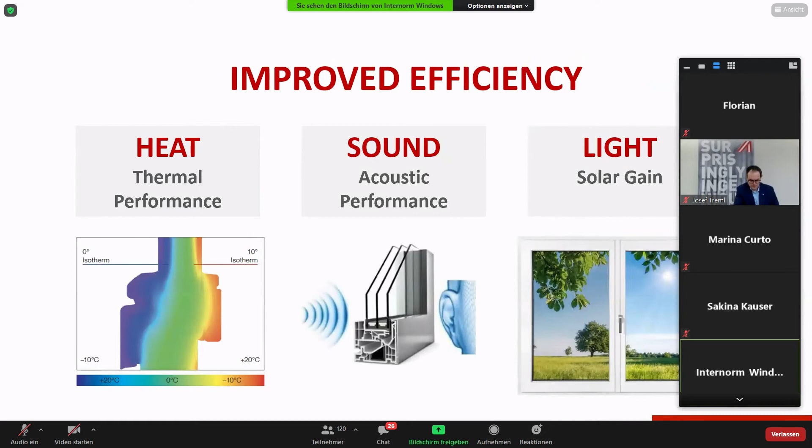So let's dive into this. Here you can see a very interesting picture that should illustrate the topic of heat. Superior thermal performance means superior comfort, and obviously a reduction in the carbon footprint.

Now the second topic, which is very important more and more these days, especially when we talk about globalization and big cities, is cut the noise, acoustic performance. This is sometimes even more important than other topics. On the right you can see a graph where sound meets the glass obstacle: sound emitted, sound reflected, sound transmitted, and in between an acoustic interlayer, which gives you the performance we call decibel rating.

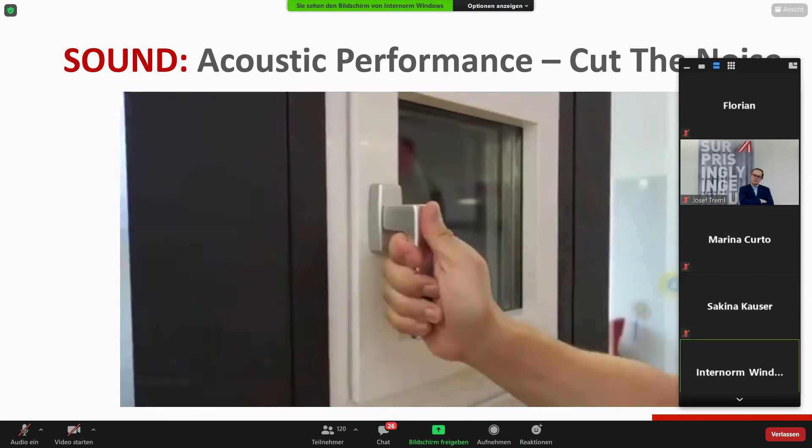So hopefully everyone could hear the difference. This was, by the way, a standard triple glazed unit with a rating of 35 decibels, and we simulated it with sound. You open the window, you close it - the difference is obvious and significant.

Now the next topic is light, and light is always important, especially these days when it gets dark early and it's still dark in the morning when we move. Usually when we go to the office or go home at night, it's always dark. So the improvement of overall well-being is important for all of us.

Just a few things on this. Conventional insulated glass absorbs up to 30% more daylight compared to premium coating. ECLAZ is something we established together with our supplier Saint-Gobain, one of the biggest float glass suppliers in Europe and worldwide. This is very important because it gives you more light - 77% more light transmission - and up to 10% more daylight, which is really important for well-being.

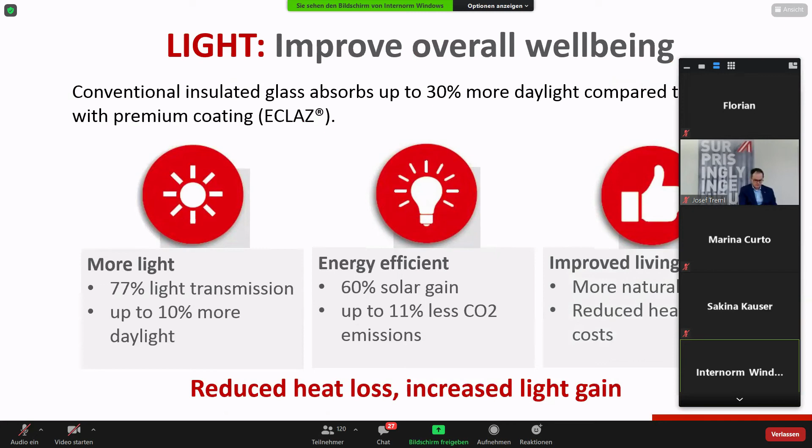Now a little bit about innovations. Internally at Internorm we call it ITEC, Internorm technology innovations. I want to just cover briefly three topics here.

One, briefly mentioned, is shading. We have a solution which is basically completely self-sufficient - it can do something without any power, so you don't need to put any power into this product. It's an integrated photovoltaic cell, which means no energy costs, even in winter time with solar gain. You can do this with day-night adjustment, and control it via your mobile phone or smart home technology now common in your house or building.

The second one is glazing again - ITEC glazing. What does that mean? The glass is now bonded to the sash, which gives improved stability to the window. Older systems still use steel for stability, and steel, as you know, is not great when it comes to insulation. On the other hand, this gives excellent thermal insulation and sound reduction, and on top of it, it improves security as well, because it's very unlikely a burglar could go through the glass into the building.

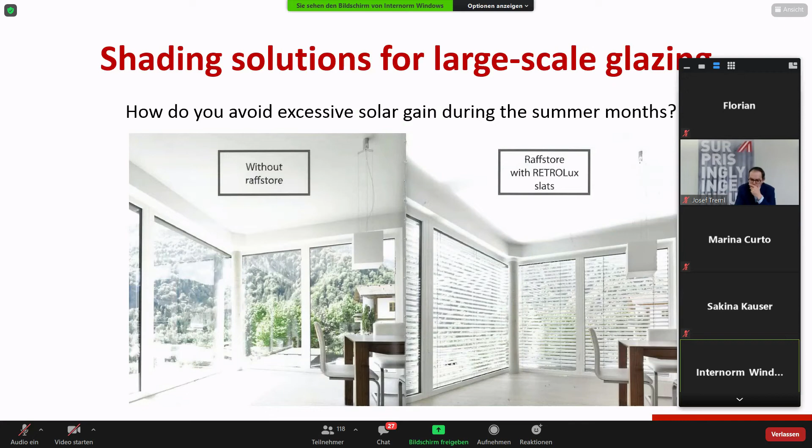What I want to illustrate here with this picture: on the left, it's a normal building, no shading, the heat is coming in through the glass, and it can, to a degree, overheat the building. On the right, what we call raffstore, an outside shading system that we produce in one of our factories, gives you a one-shot solution, and you can actually improve the room and bring the temperature down accordingly. If you do this in a clever way, which you can control with smart home technology, with your mobile phone, or with a sun sensor, it can reduce the temperature by up to 10 degrees centigrade, which is quite a lot.

Just a few other bits I want to illustrate. To cool a room by 1 degree centigrade with air conditioning uses 3 times more energy than heating it by 1 degree centigrade. Up to 30% less energy consumption with passive cooling and solar heating. One effective shading solution can save around 8,500 kilograms of CO2 in its lifetime. This is maybe, you know, what does that mean? It's a lot, it's actually a lot, just if you improve your shading solution. In its manufacture, use and disposal, it only generates around 150 kilograms of CO2. So if you see the calculation, it explains itself.

Very important, last but not least, is the correct placement of large-scale windows in the building. That's where the designer, the architects, come in, and if they do this in a clever way, it can achieve so much more.

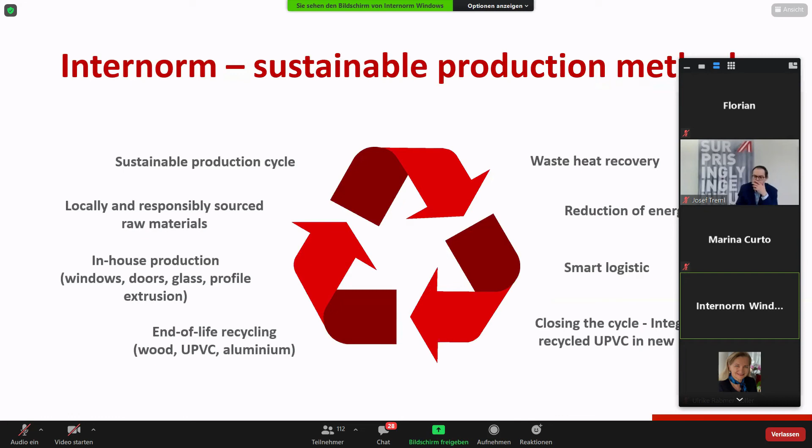A quick reminder - we're all working on the Climate Act 2008, which means an 80% reduction in carbon emissions relative to 1990 levels, to be achieved by 2050. I don't really know where we are at the moment, but we're talking a lot about electric cars these days, CO2 emissions, diesel cars, and all these kinds of things. The bigger impact will be on the improvement of our buildings, especially in the UK and Ireland. We have a very old building stock - old buildings that are not very efficient.

It's not only windows and doors, obviously, but we need to insulate buildings accordingly. Putting triple glazed windows in can reduce the utility bills, reduce the carbon footprint, you name it. I think we're able to achieve the levels we need to by 2050, and I think buildings are the key to achieving this. A lot of focus is on traffic, but at the end of the day, we have millions of buildings across Europe, and I think that's where we could really make a massive impact.

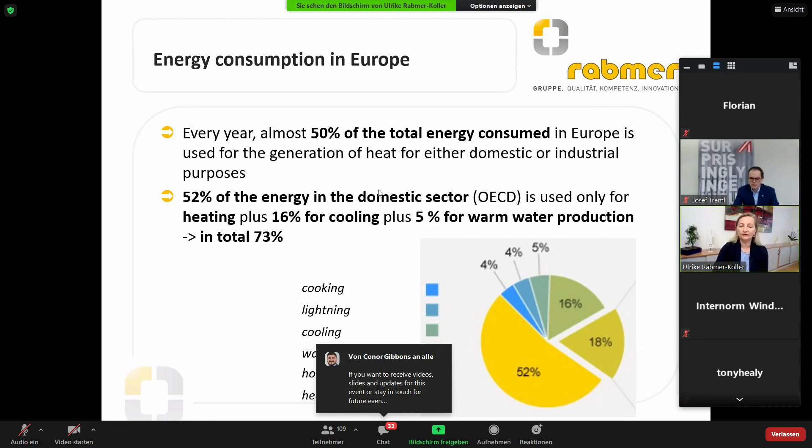At the moment, most of this heating and cooling energy is based on fossil fuels such as oil, gas, or coal. To reach the European and national climate change goals, we have to use renewables for heating and cooling of buildings. There are several technologies available: solar thermal solutions, biomass, geothermal, energy from exhaust air, and energy from wastewater. Why energy from wastewater?

As I said, it's available 24 hours and 365 days a year. Wastewater is renewable energy, also stated since 2018 by the European Commission and the Parliament, and it has relatively high temperatures for further use. In urban sewers it's between 12 and 18 degrees, and in industry we have up to 30 degrees and more sometimes. The technologies used are tested and matured now, and studies in Germany say that 10 to 14% of the heat demand in the building sector can be covered by energy from wastewater.

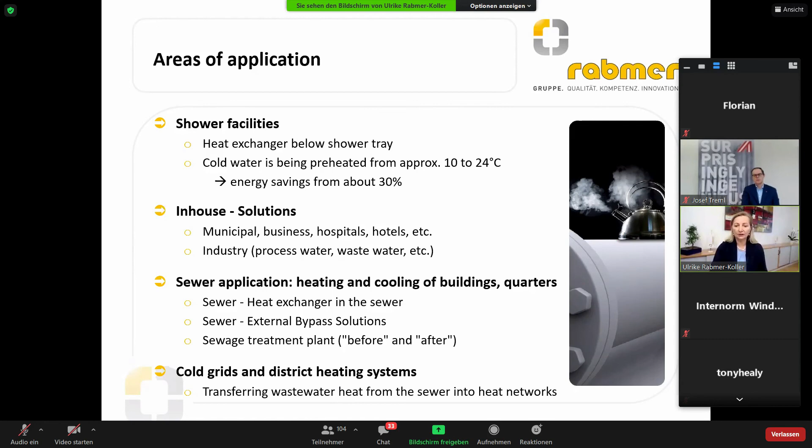For the in-house solution, innovative heat exchangers are used, either alone or combined with heat pumps. You can regain up to two-thirds of the heat, and install systems from 10 to 100 kilowatts. It starts with available wastewater volume from 3 to 10 cubic meters a day, used internally for the building itself, for preheating the water.

Here we have the sewer energy scheme. You see that we put, in this case, the heat exchanger either in the sewer or next to it. The sewer provides the thermal power, which we extract and transfer to heat pumps, and further on to the regular heating in the building. The heating and cooling capacity depends on the targeted temperature, with a COP of 4 to 5.

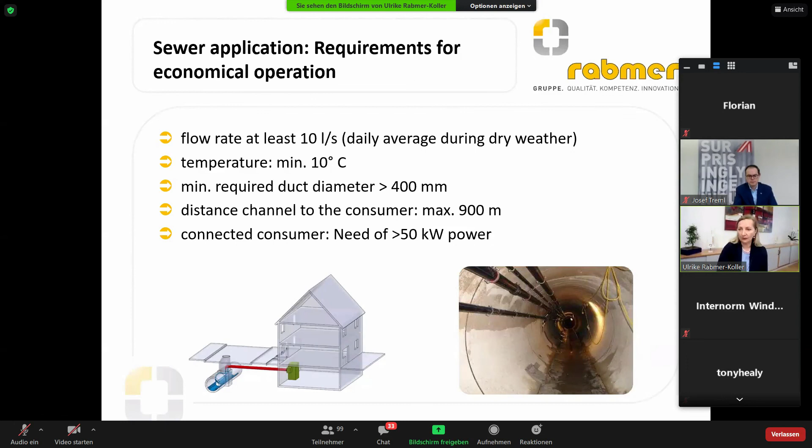So the technology for the heat exchangers, you see here also, this would be the sewer where the heat exchanger is placed. And then there is also a piping system underneath this heat exchanger. And then you have this flow, the water flows through the channel and then back to the pump and then to the customer.

So in this sector, you see the heat exchangers which are placed into the sewer. Here, here the model, and here you see the pipes. And when it's finished, it looks like this here.

So it is suited actually for all channel types, and this system is actually industrial manufactured plate heat exchangers made of stainless steel.

It is installed in existing or newly built channels, and you need a complete overflow during periods of dry weather. It is a very quick installation, and you don't have visible pipes, you see it here. And the lifetime is more than 50 years for these stainless steel heat exchangers.

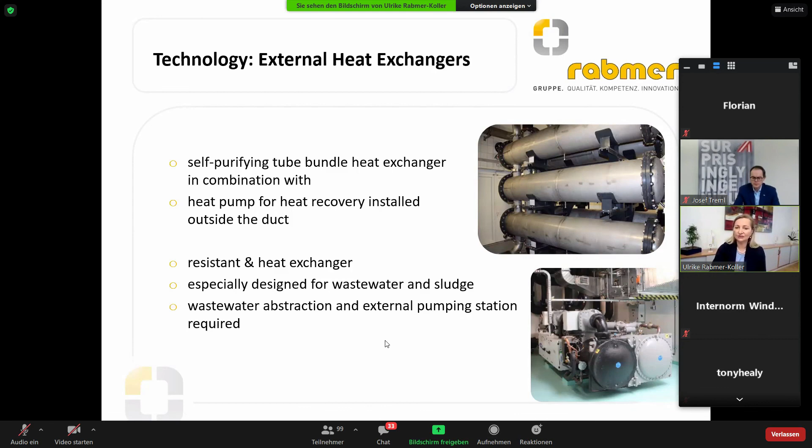And the wastewater abstraction and the external pumping station are required, as I showed you before.

There it was 400 kilowatt heating, and also into the district heating bigger than 80 degrees. And there was also another project in Rheine where 105 kilowatt was delivered for heating and 130 kilowatt for cooling. And also one project in Stuttgart where 300 kilowatt heating and 484 kilowatt for cooling.

And there are also some examples in Austria where for offices and business parks, we did one project for Wien Kanal in Blumenthal. The first project was done 3 years ago. There were 360 kilowatt heating and 750 kilowatt cooling.

And the next project, Blumenthal 2, is under construction at the moment. And at the final project end, there will be a capacity of 430 kilowatt heating and 450 kilowatt cooling. And there is another project in Innsbruck which delivers 150 kilowatt heating.

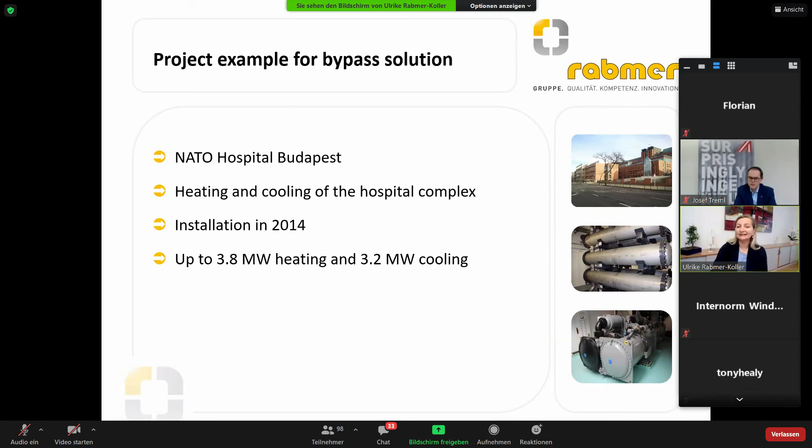And there is also a very big example for the bypass solution. Here is an example, the NATO hospital in Budapest. There was a requirement for heating and cooling of the whole hospital complex. The installation was done in 2014, and up to 3.8 megawatt was produced for heating and 3.2 megawatt for cooling.

And you see here also the project specific design, it was tube bundles for the external bypass solution. The heat exchanger was really planned specifically for this project. And there are 18 heat exchangers with 200 kilowatt capacity each.

And of those 18 heat exchangers, mostly only 12 are in use, so the maintenance can be done on the other ones. This guarantees that the ongoing operation will not be interrupted at all. There is also a very high self-cleaning effect on the heat exchanger bundles, and this is monitored all the time.

This project also uses high-performance heat pumps, with two heat pumps each having 1.9 megawatt heating and 1.6 megawatt cooling capacity. Pump 1 is for the base load, and pump 2 for variable demand coverage. In this project, a COP of 6 to 7 could be reached.

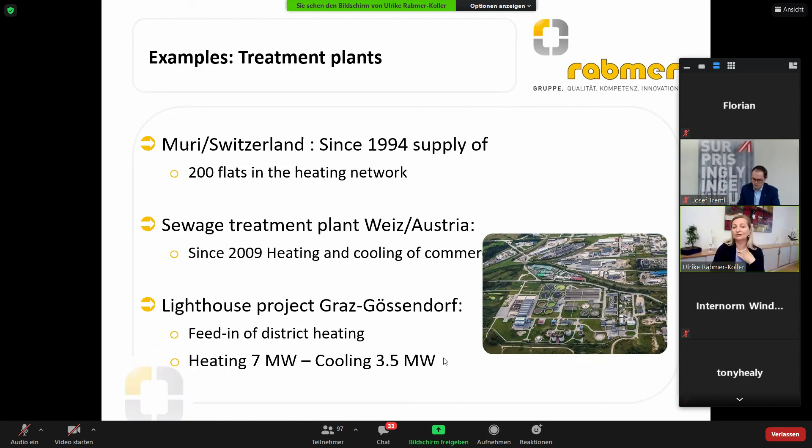There are also examples of using sewage from treatment plants. In Muri, Switzerland, there are 200 flats heated with this system. At the sewage treatment plant Weiz in Austria, there's heating and cooling for commercial buildings. There's also a lighthouse project in Graz-Gössendorf, feeding into district heating, requiring 7 megawatts of heating and 3.5 megawatts of cooling.

There are also some projects going on in Vienna, with a planned 200 megawatt input for the district heating system, using energy from the sewage treatment plant and the sewer. There's also a treatment plant used for heating and cooling of the plant itself in Budapest, as well as for stabilization of the plant biology.

So what is required to decide if heating and cooling with renewable energy from sewer is possible? You need first a potential survey via data collection. You need to know if there's any public sewer near the building complex, how much wastewater flows through it and at what temperature, and what distance there is from the sewer to the potential energy consumer.

With each project, you should investigate if renewable energy from sewer is possible for heating and cooling the building. We need a survey of the customer, the energy requirements, the energy concept, and all availabilities. There also needs to be pre-coordination with the wastewater company to see if they are ready to make a contract to supply the wastewater.